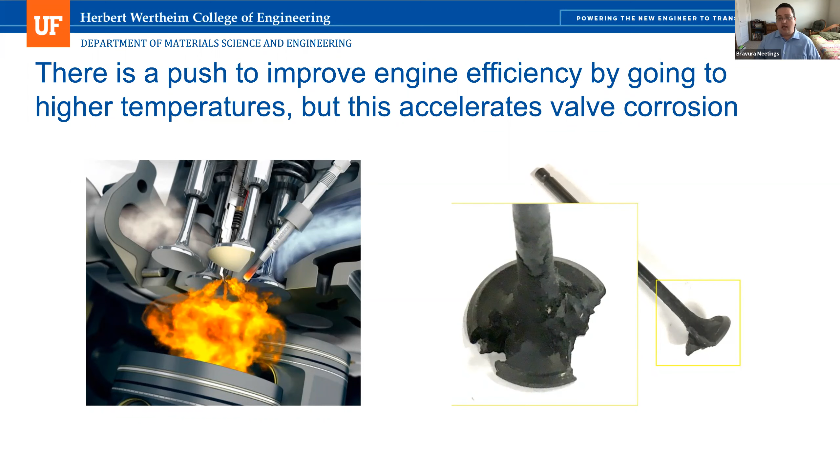And so you can start to get very significant corrosion, which has a large impact on the performance of the engine. And so we have to replace the engine valves.

Now, the way that most companies deal with determining what material to use for the valves is they just have effectively a database or something like this table that I'm showing here, where for each material, there's some max temperature where they've certified that material.

And if they change to an engine design that has a higher temperature, then they have to use a different material. And that can be often a totally different category of material, which can be a lot more expensive.

Now, the goal of this project is to develop a tool to help us take an existing alloy and try to optimize and improve its performance without having to move to a whole new category of materials.

And we're specifically targeting valve steels, so the 21-2N and the 23-8N valve steels, and looking at how we might be able to improve these steels.

And so these are stainless steels, so we have a high level of chrome, and then we've got some manganese and some nickel.

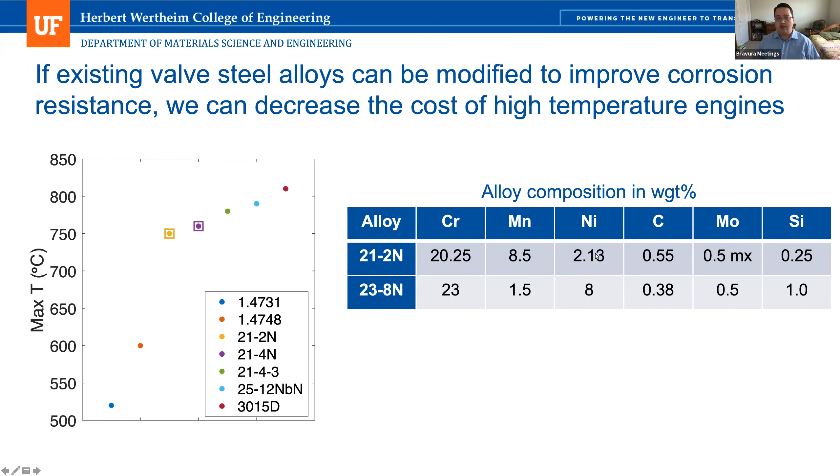Now, the tool that we're developing is called the Stainless Steel Alloy Corrosion tool, or the SStAC tool. And the goal is to develop a tool that can be used to optimize these engine alloys, these valve alloys.

And so it has to be able to predict the corrosion as a function of the alloy composition, and also as a function of the microstructure of the valves.

And in order to develop this capability, we are involving experiments, both lab experiments and also engine tests for validation. And we're also using lower length scale modeling, so we're using phase field models and also density functional theory.

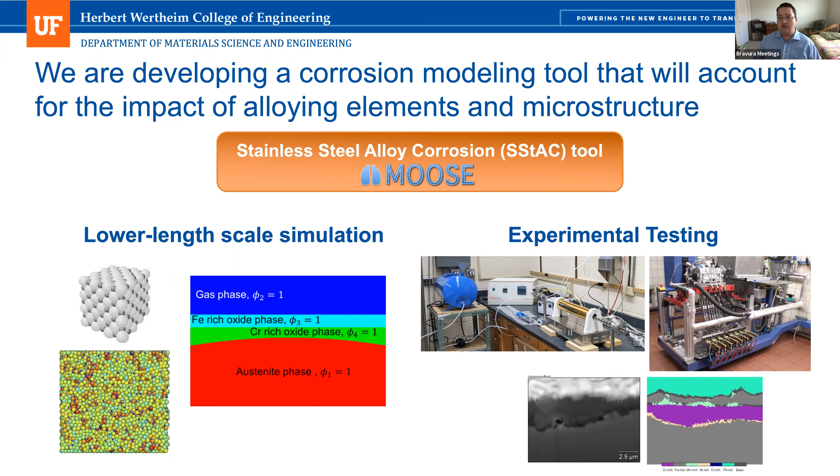Now, once completed, our tool, our SStAC tool, will be an open source tool, and it will be a finite element based tool. So we're developing it using the finite element method and based on an existing finite element library

called MOOSE. So this is an open source library where MOOSE stands for the Multiphysics Object-Oriented Simulation Environment.

And our tool will be able to predict the geometry of a specific engine valve and predict the corrosion in both 1D, 2D, and 3D.

And so we'll be able to dictate the composition of the gas, the temperature history, but also the composition of the alloy and some microstructure descriptors like the average grain size or second phase particle composition or concentrations. And so with that, we'll be able to predict the corrosion of the engine valve.

And the way that we actually are going to resolve the formation of the oxide layer within our SStAC tool is using the extended finite element method.

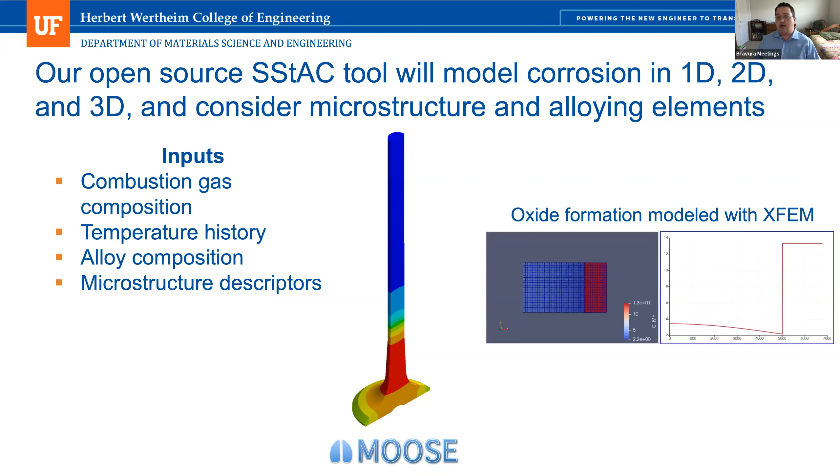So here's just a simple example of this, where we're having growth in 1D. And so we can actually have this alloy, this oxide layer grow using the capabilities of XFEM.

Now, as we develop our model, we need to have this sensitivity to microstructure and to alloying elements. And so we're using a multi-scale approach with both experiments and modeling to allow us to do that.

So at the University of Wisconsin-Madison, they're focusing on the development of the SStAC tool itself and also on carrying out the engine tests.

At the University of Florida, we are trying to provide real lower length scale information about microstructure and alloy composition using phase field simulations, where we're developing a new capability also using MOOSE, and also density functional theory calculations in order to get important properties that we may not know.

Idaho National Lab is helping us with using the MOOSE framework. And TENNECO is supplying the engine valves and also carrying out engine testing to help us with validation.

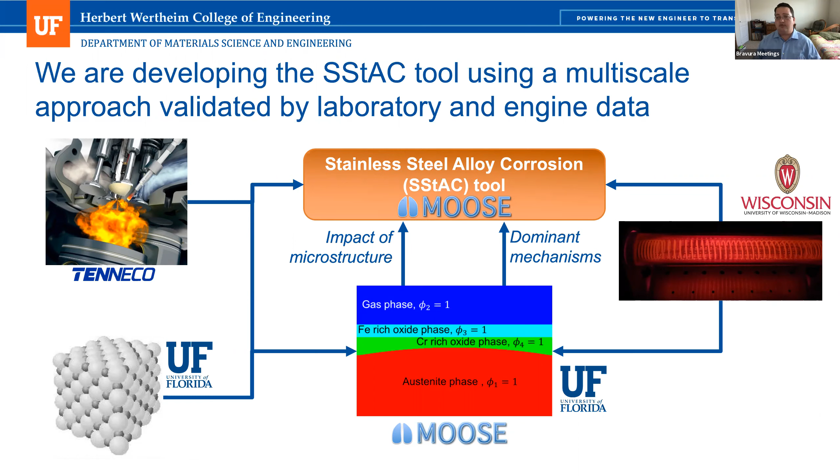Now I want to start by talking about our laboratory experiments, because we're allowing the experimental results to really dictate how we develop the model, and I'll illustrate that as we move forward.

So we take engine valves supplied by TENNECO, and then we section out samples from the valves, and we characterize their microstructure, and we also characterize second phase particles and so on, also the texture.

And then we take those samples and put them into an experimental apparatus that we've established at the University of Wisconsin-Madison, which has a furnace that allows us to control the gas environment within the furnace.

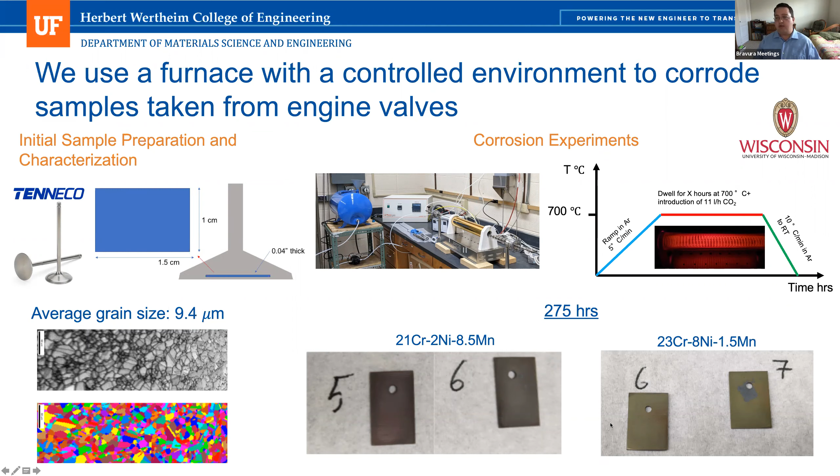And then we can use the furnace and go through different temperature ranges and temperature cycling and so on, and then look at the corrosion of our samples. So we then remove the samples, and then we can do microscopy and characterization of the samples after oxidation.

Now, our preliminary results - we've completed testing all the way up to 1,000 hours on two different alloys, the 21-2N and the 23-8N alloys. What we found to begin with is that the 23-8N shows a lot more scatter in the results when we do multiple samples, and we're seeing just more oxidation in general.

In addition, with the 21-2N, we're seeing much less oxidation and much less scatter.

Now we can look at EDS results from 275 hours to give us some idea of what's going on here. And what we see is that within the 21-2N, we have a lot more manganese. So we're getting this manganese oxide layer that's forming, which seems to be more protective, which we don't see in the 23-8N. So the manganese seems to be important.

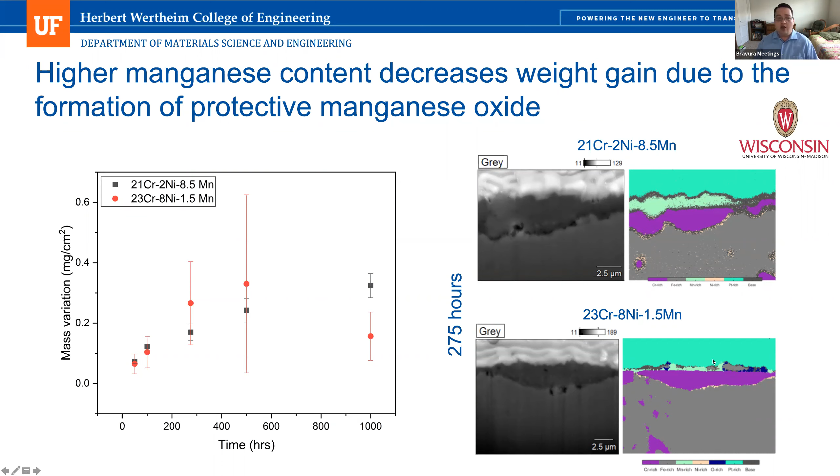So we're going to look into that in more detail now, just focusing on the 21-2N with the larger manganese. We've done SEM on samples from various amounts of oxidation time.

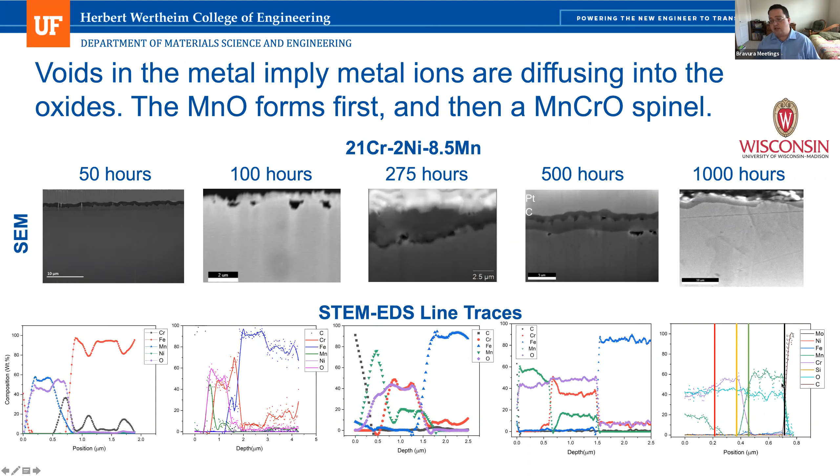So we can go through and actually look at the oxide thickness of the oxides over time. At 50 hours, our manganese oxide is our largest oxide, but from then on, it's essentially shrinking, and we're getting less and less manganese oxide.

Now, at the same time, we have a chrome oxide layer that forms and starts to grow, though it's never very large. But what really is dominating the oxide growth is the growth of this spinel.

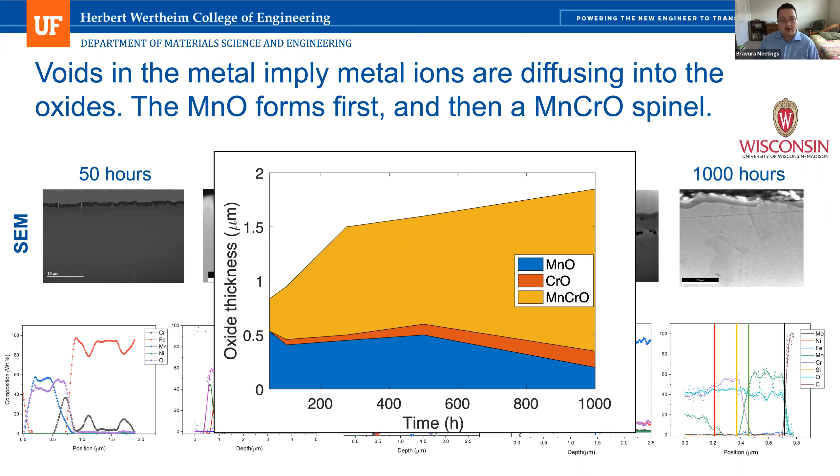Now, if we look at this in more detail with thermodynamics, we can start to understand what's going on here. So if we look at the oxygen partial pressures of these different oxide types — manganese, chrome oxide, and the spinel — the most stable oxide is thermodynamically going to be the spinel, then the chrome oxide, and then the manganese oxides, which have various types and are less stable. And that explains why over time we see the manganese oxide thin while the chrome and the spinel grow.

But a valid question then is, well, if the manganese oxide is less stable, why did it form in the first place? And one possible reason for that could be kinetics — it could be that the manganese is able to migrate more easily and start to form this oxide layer.

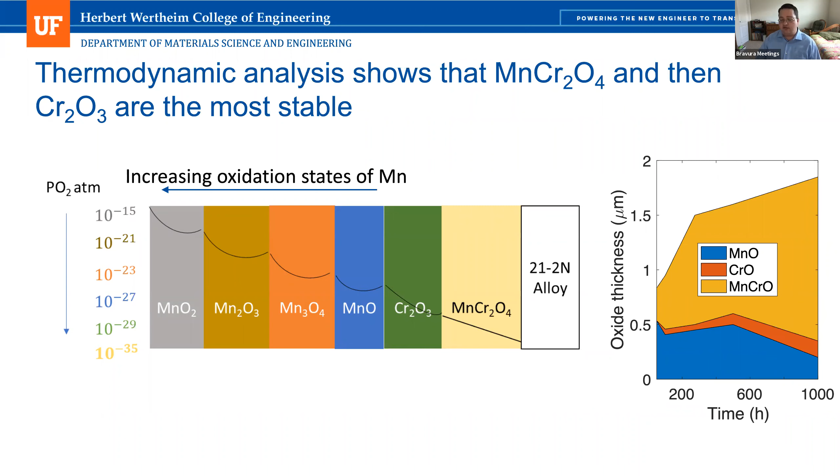So we started to look at this more now with density functional theory. With DFT, we've looked at the vacancy formation energy for different types of vacancies in the metal, some representative alloy, and then the spinel and the manganese oxide. One thing that stands out right away is that the vacancy formation energy of the manganese is quite low, while the oxygen vacancies would be much higher, and the oxygen vacancies are also higher in the spinel, though the metal vacancies also have a fairly large formation energy.

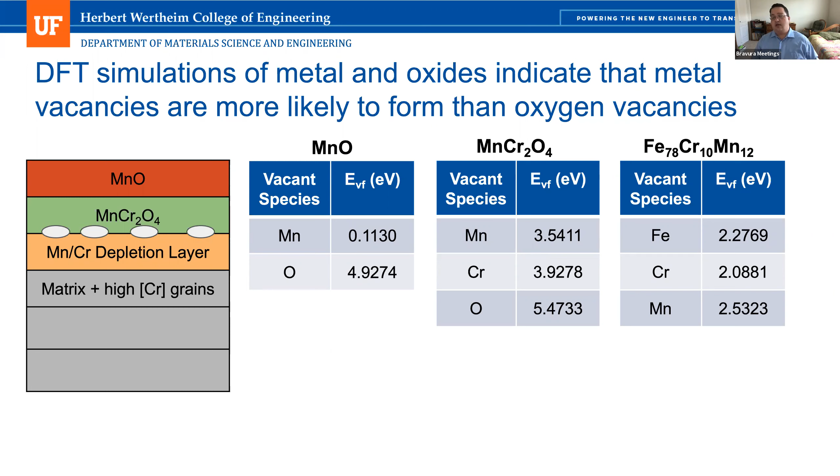So this very low vacancy formation energy implies that we'd have a fair number of vacancies in the manganese oxide, and that may be why the manganese can migrate more readily there, giving us this faster formation of the manganese oxide at the very beginning of its life.

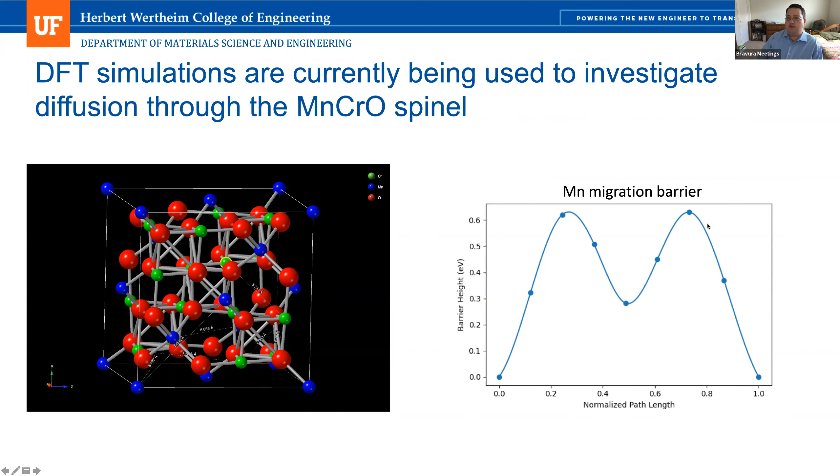Now we're using DFT to look more into the migration barriers, to give us even more information about that. We've just begun this work, so we're looking at the spinel first, and we've started with the manganese. We're looking at different ways that manganese can move through the material, and we can get migration barriers from that, but that work is still in progress.

Now we are developing our phase field model, which is going to allow us to look at the actual growth of the oxides and to spatially resolve the evolution of the oxides over time. The way that we do that is we represent various aspects of the microstructure with variable fields that evolve and change over time.

So within our domain, anywhere the variable psi1 equals 1 will be an alloy. Anywhere psi2 equals 1 will be the spinel, psi3 equals 1 will be the chrome oxide, and so on. So we have 6 variables representing all the different types of regions of the material that we might have — our 4 phases, also a void phase, and then the gas phase where we have the free surface. So we have 6 variables representing the evolution of those.

We also have 4 additional variables describing the molar volumes of chrome, manganese, oxygen, and vacancies. Then the evolution of these variables is defined by partial differential equations that are functions of derivatives of our overall free energy of the system. So it's trying to lower the free energy over time.

And so we define the free energy as a function of all of these variables. We have a chemical part of the free energy, and we're taking that information from thermodynamic databases and making some approximations, so we can have a free energy curve for each phase. And then we also need to include the electric energy — we need to have the impact of the electric potential, because this is an electrochemical problem.

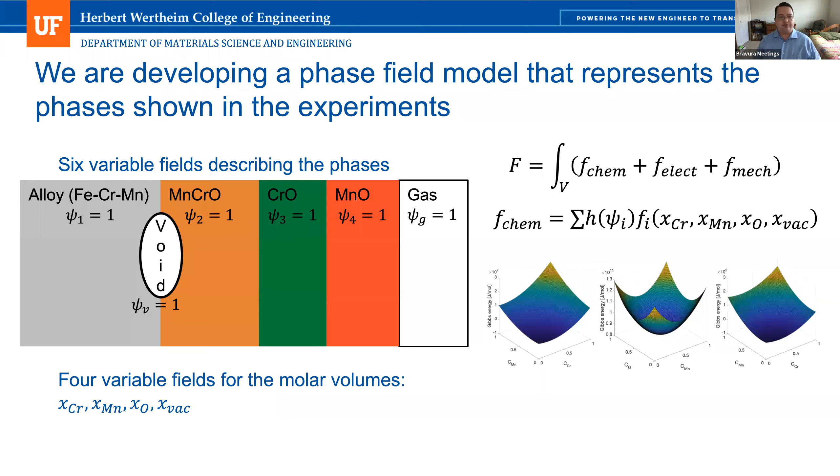And then finally, we will eventually add a mechanical energy as well, due to mismatched strains that can form in the material. So we've implemented our model so far without the chrome oxide phase and without the mechanical energy, but with the electric energy.

We've started some preliminary investigations just in 1D, though we've done more than that, but I want to demonstrate some of the capabilities. Currently we're assuming all the different compositions are moving with the same kinetic rates until we get a better idea about the kinetics from the DFT. But we can look at just the impact of boundary conditions.

So we have an initial microstructure where we have some metal, then a void, then some more metal, and then we've got a thin spinel, a thin manganese oxide layer, and then our gas, where our oxide will grow into the gas region.

And we're setting boundary conditions. On the left, we're allowing manganese and chrome to enter the system. On the right, we're allowing oxygen to enter the system. And we're defining that in terms of a set chemical potential on the boundaries.

When we set the chemical potential of all manganese, chrome, and oxygen to be equal, first off, the void grows and actually overtakes this secondary metal phase. And so we end up just having a void right on the oxide metal interface, which is what we've seen in the experiments.

And then when the chemical potentials are all equal, both the manganese oxide and the spinel phase grow at equal rates.

When we have a higher chrome potential, so more chrome entering the system, then the spinel grows faster because there's more chrome. When we have more manganese entering the system, then the manganese oxide grows faster.

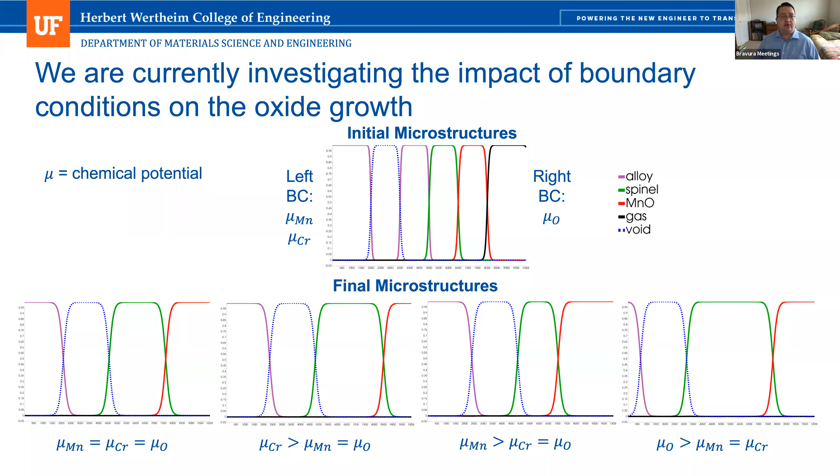So all of this, the experiments, the density functional theory, and the phase field, are all going in to try to add our critical capabilities to the STAC tool. And the most important part of the STAC tool will be a corrosion model at the macro scale. So we're working on developing that corrosion model as well.

But this is a macro scale model, so we need to make assumptions. First off, we're just going to have a single representative oxide. We also need to have other assumptions.

So we're assuming defect fluxes are constant in the oxide. We're assuming the interfacial reactions are at equilibrium and a zero net charge in the oxide. So we have a charge compensation condition.

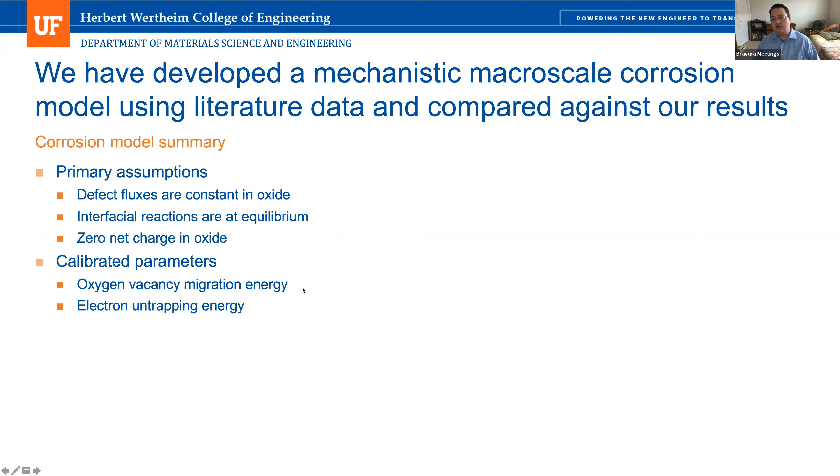And then we have calibrated parameters that we set by comparing to experiments. And then we have the oxygen vacancy migration energy, which we may eventually replace with DFT results. And we're also fitting the electron untrapping energy.

So we've done initial fitting of our model by comparing to experimental data from the literature for a stainless steel alloy without manganese. And then we compare the corrosion rate, and we get reasonable comparison within 25% error, which is the pink lines, with the 23-8N results that have a small amount of manganese.

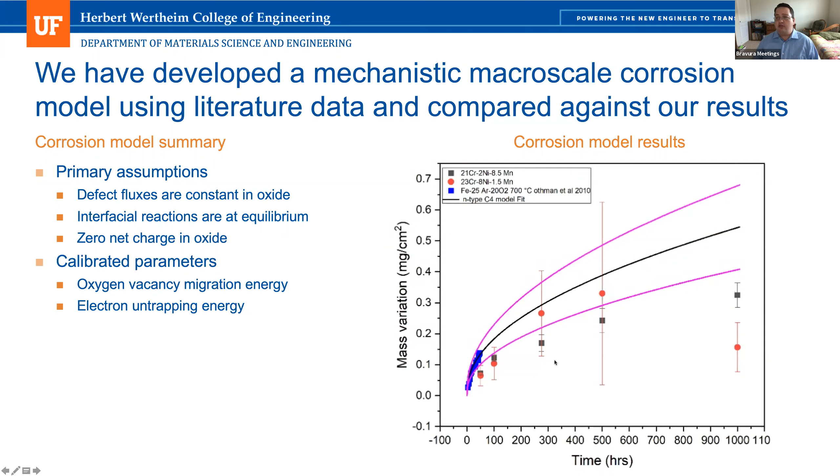But we are not getting good comparison with the 21-2N, which has a lot more manganese. So this again shows us the importance of manganese. And so we're now continuing to move forward, and we'll improve our corrosion model by carrying out more experiments and also using the lower length scale simulation results.

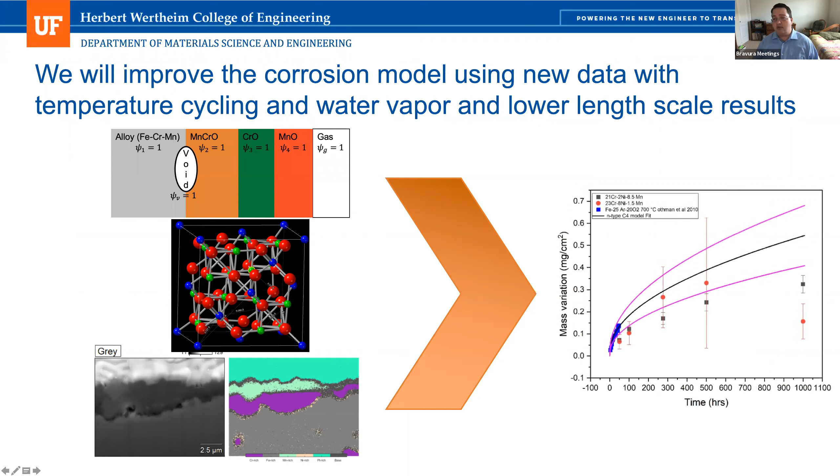To conclude, we're working on developing the SStAC tool. This will be an open source tool that will be able to predict the corrosion of engine valves, and it will include the effect of alloying elements and microstructure.

And we're using a multi-scale approach to develop that with experiments and lower length scale modeling. So far, we've been able to show the critical impact of manganese on the corrosion of these valve steels, and how the manganese chrome oxide spinel seems to be the most stable oxide.

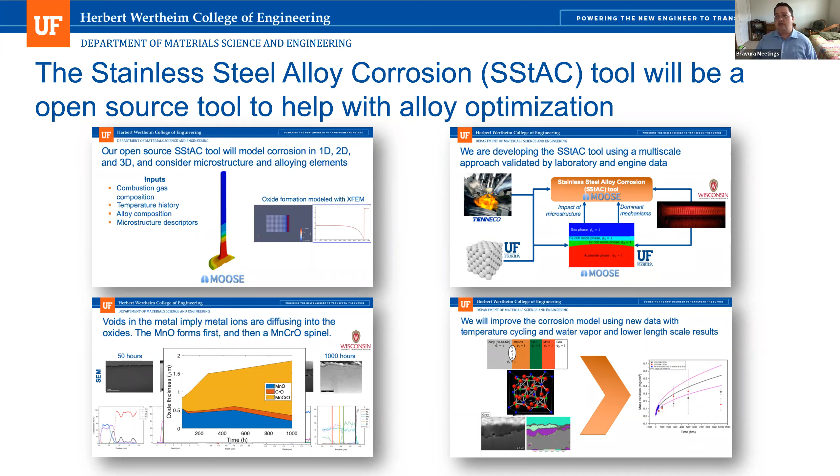And we've started out with a preliminary fit for our macroscale corrosion model, but we're now working to improve that fit using additional experiments and also our lower length scale simulation results.